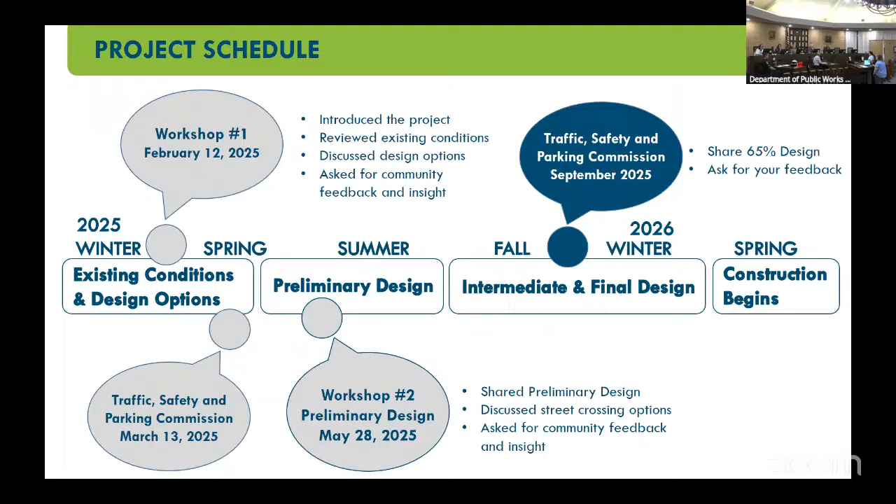Just a quick summary of outreach - some of this you've seen before, but I wanted to include our first meeting with the community back in February. We also did direct outreach to stakeholders along the corridor with private meetings, as many as would call us back or meet with us. We held 6 separate virtual stakeholder meetings, and a couple of follow-up meetings with others who had supplemental questions.

We had our original online survey with only 16 respondents. I then presented to you back in March and you gave great feedback. We had a second virtual community meeting in May, which was better attended than our first in-person meeting, with good feedback and communication. We had a second online survey where we only had 2 respondents, which is unfortunate.

Now, a summary of the feedback we've gotten. From the online survey, we heard: preserve existing parking along the corridor, vehemently requested by everyone; pedestrian crossings and sidewalk improvements along the corridor; concerns regarding large vehicle congestion and turning movements with any improvements; and concern about vehicle capacity if we reduce a lane through a road diet.

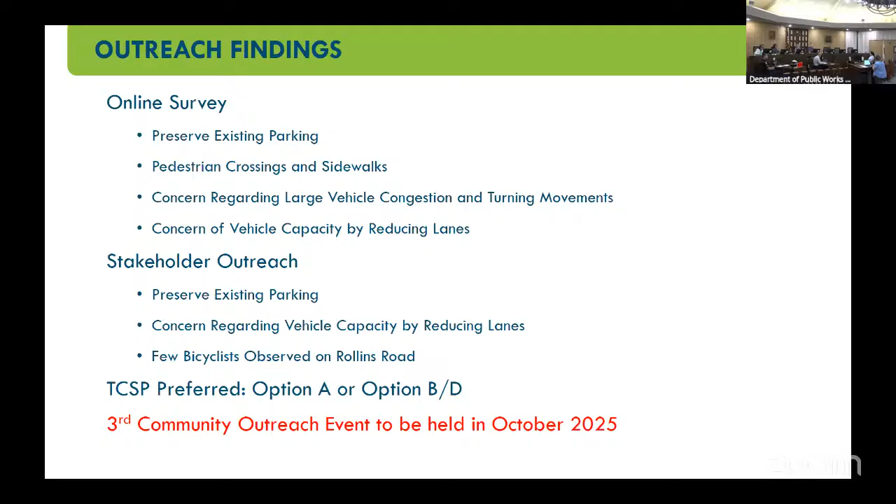So based on all the feedback that we got, both from community members, from the online survey, and from this commission, we selected the concept that you see on your screen there, which includes a road diet, preserves parking on both sides, has the center turn lane, and has the Class 4 buffered bike lanes on either side. And this is also consistent with the bicycle and pedestrian master plan preferred concept.

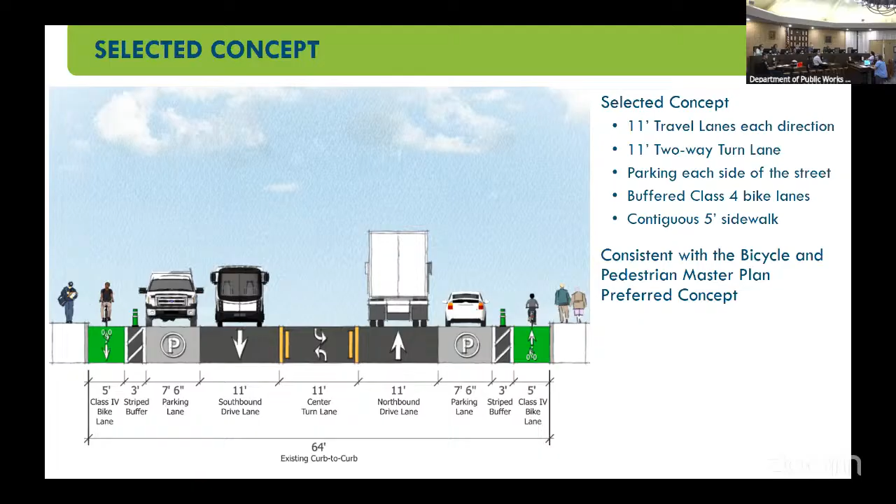So that's in line with the prior outreach efforts that were done then. Now, some of how we arrived at that particular conclusion—as I was going through what concerns were being raised by the stakeholders and the online survey and such—we used that as our guideline for selecting which cross-section to move forward.

So, for example, vehicle capacity was a major concern, and the existing roadway has the ability to convey 36,000 vehicles per day. The actual average daily demand today is less than 10,000. So with a road diet reduction, we're only reducing the capacity down to 25,000 vehicles per day. So in that regard, we felt that the road diet was appropriate in this scenario.

The concern regarding on-street parking: in the existing condition, if the corridor were parked efficiently—and as we know, it's not currently striped for parking, it just has the side bar—people are not actually taking up their 20 to 22 feet per vehicle. So they're not actually parking efficiently, but there would be 281 stalls.

With this proposed concept, we're reducing down to 264. However, we are striping each of the stalls so that there could be 100% efficiency in that parking. So this is less than, I believe, a 7 or 8% reduction in the overall parking.

And then, of course, the question about bicyclists. Well, to be honest, why would you ride in a Class 3 bike lane along Rollins Road with significant heavy traffic? You wouldn't. So what we're proposing is upgrading the Class 3 and Class 2 bike lanes that exist today to Class 4 buffered bike lanes.

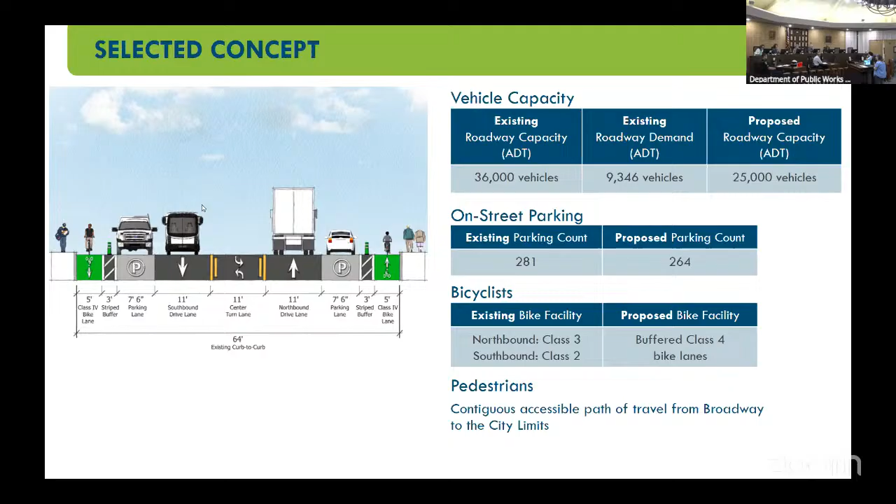Now, the next thing that I want to show you is actually a little bit of a change from what you saw before. Originally, when we presented this to the commission, we had not included improvements between Marsten and Broadway. And largely that was to try and limit some of the impacts to the businesses, as well as any queuing situations, and of course some projects that will be coming online later.

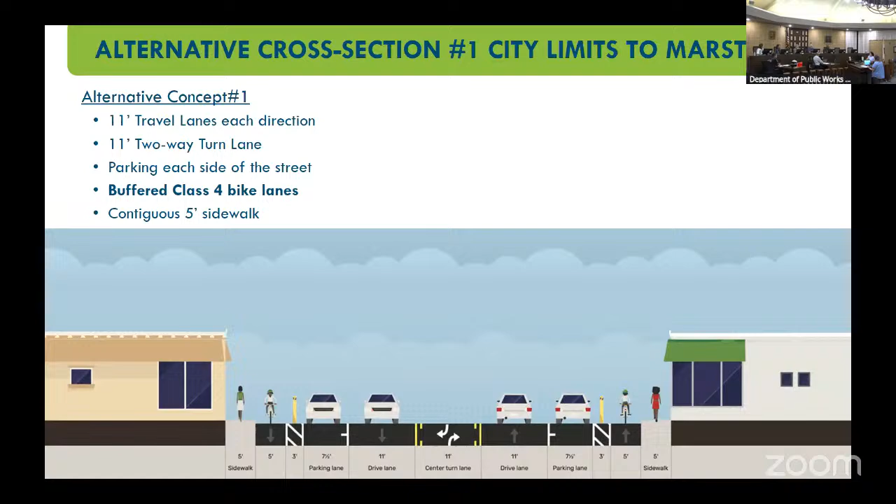When we have high density housing going in there, and we have it now, any accommodations made for increase in traffic entering and exiting those complexes? Was there any accommodation made in the plan for that? Right now, the street capacity is significantly more than it needs to be, and it can accommodate larger facilities when it comes to volume of traffic for vehicles. As for where the driveway comes in, it's been designed in such a way that should be a fairly easy modification. We may lose a few parking spaces if it's currently an empty lot.

Basically, the design is made so that as potential lots are redeveloped or new development comes in, it's a simple modification to what's there. We have the codes for turning movements and that sort of thing. Driveways are obviously bigger if it's a commercial business coming in versus a residential, because of the type of vehicles that will be coming in. Usually with a residential high density thing, you're looking at an Amazon truck turning in and out, or a UPS truck versus a double wide semi truck, which is the auto related sort of vehicles that we see quite a lot along this corridor.

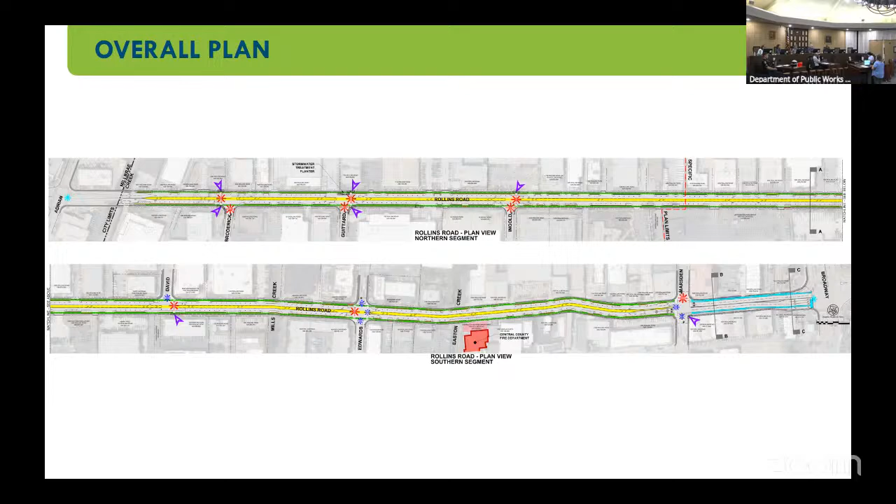Okay, and you led right into my next question about delivery trucks. Can you go back to the alternatives, the last slide you had? So what would that look like? The delivery trucks along this corridor, are they going to take up a lane? Or are they going to try and squeeze into a parking area? Or are they going to turn into a driveway of a business? How does that look?

So currently there are zones marked yellow for certain businesses, and we are maintaining all of the existing yellow zones, meaning the area where the cars are currently parked gets striped with yellow, and it's a loading zone for those businesses. So we're maintaining those. There isn't a whole lot we can do about it — usually I don't want to point fingers, but it's typically the vehicle delivery trucks, we've all seen them with all the trucks and everything. They will likely go to a less busy parked area, and then they'll pull into the parking space and take up multiple spots to wait for their ability to turn into the business.

Okay, they should not be camping out in the center turn lane or in the travel lane — they can't block the travel lanes. Some of them do even today. Because then you're going to have people racing in that left turn lane around them, right? And then we have a problem. So, okay, but they're not really allowed to park their delivery truck in that travel lane or the center turn lane.

All right, those were my questions. And then you asked for recommendations on a couple of things, so if you want to go to those two slides. So, intersections — this is brand new to the commission, you had not seen that before, so I was hoping to get your feedback on this particular layout. And then the second bit of feedback would be a preference of alternative 1 or 2, or an amalgamation of the two.

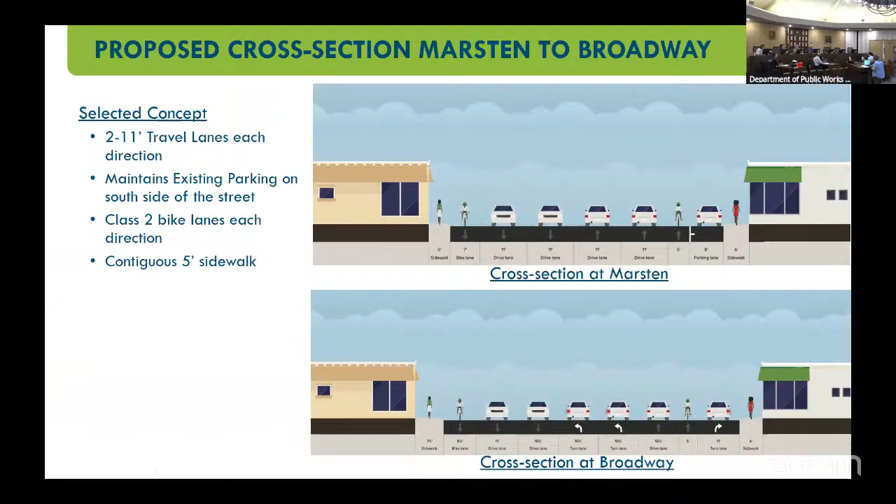Okay, so back to the intersection. That was at Broadway and Rollins, right? Was there a complementary Broadway intersection on the other side, or is this just the one intersection? Never mind, forget I said that.

So we're going to look at this. Any opinions or concerns about this routing of traffic and bicyclists? I think it looks like a good solution, I don't know that there's really any other choice. At least you preserve parking on one side to make some people happy, and you've fit everything else we need in.

Note there isn't parking on the other side currently, so we aren't eliminating parking. I'm just glad you decided to continue, and I think as much as we can, we should create continuity - this is clearly one destination, people aren't jumping off to go somewhere else, they need to traverse the entire stretch. You're committed, so I'm glad to see we have a plan that takes us all the way through.

I don't have any other comments. Commissioner Brown? No, I agree 100%. I think because this is probably where most of the traffic occurs on Rollins Road when they're making these turns onto the freeway or into Burlingame, being able to keep the flow, I think this probably makes the most sense as well.

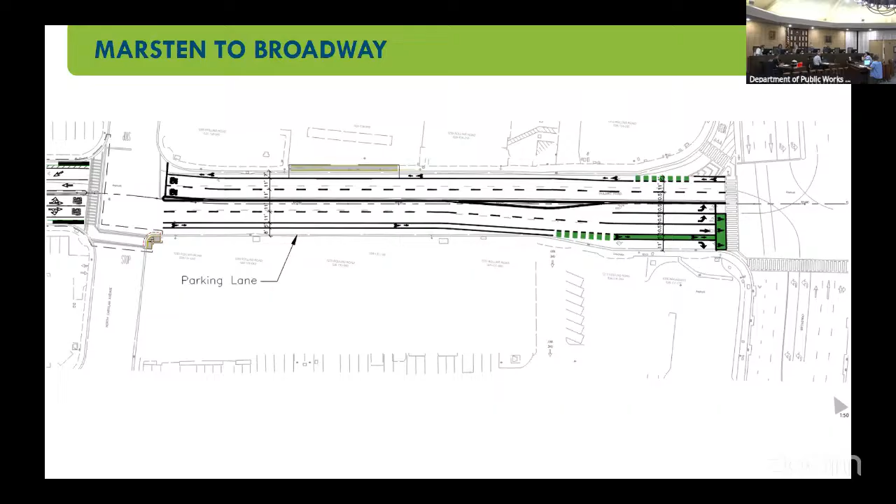The second question was bollards or concrete medians - who wants to give an opinion on that? I think the green bollards, having like a wall of bollards, is more noticeable to me as a driver, but you have the experience and know what actually ends up being safer. It sounds like the bollards are fairly, like 2/3 the price, but they also have higher maintenance costs. So I think either solution is fine. I wouldn't want to pick one myself without knowing if this project is funded, or whether we need to take cost into consideration.

And which alternative has been safer for cyclists? I would just go with the experts who know that. But they both seem to be acceptable and very good alternatives.

Commissioner Brown: I have a question because I think that's a good point. I wonder if there can be a combination of the two. I wonder if you can have the visual of bollards, but maybe not a whole line of them, but space them out so that there's a visual and you still have the safety that the concrete provides.

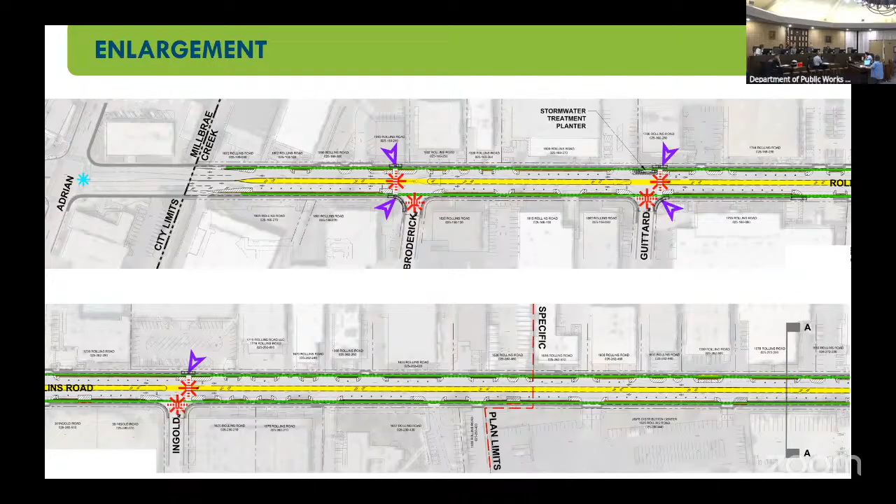Any other last thoughts? Do we provide you enough information? I think you gave me a lot of really great information. Okay, I appreciate everyone taking the time. It's a great project. Did a great job. All right, thank you, Ms. Herberston.

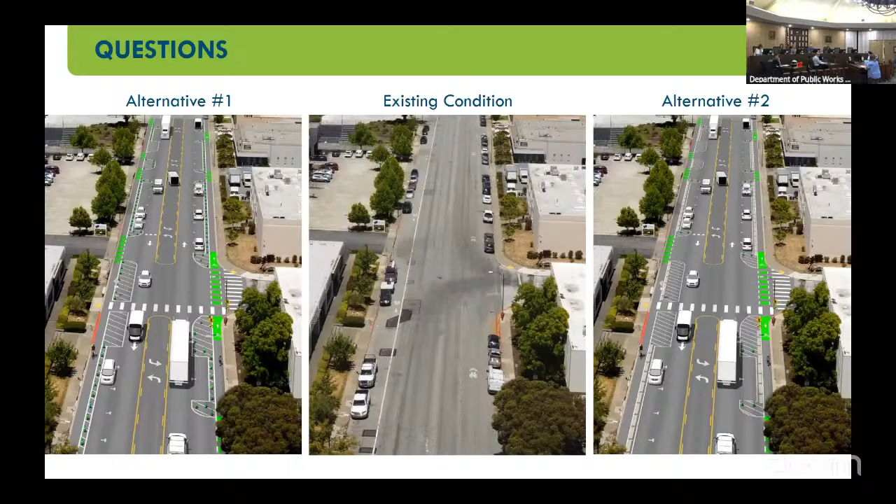We appreciate it. And the next phase will continue - when might we see final designs and implementation? So you will be seeing final designs by the end of the year. Okay, for our funding requirements, we need to be at that point.

So I appreciate you working me in this month and not pushing till next month. That was going to make things difficult. And Mr. Wong? Sure, no, that's correct, because we're going to have the October event. What I was just going to mention - public comment - just in case.

Is there any public comment? There's no emails. Okay, appreciate it. Well, we thank you very much for the presentation, and we look forward to the final design. Very good.

All right, we will move on to item 7A. Any public comments to any of the informational items? Mr. Ting, any public comment? There are no public comments. It's all procedural. I knew there wasn't, but I had to ask.

All right, so community group updates, anything, Mr. Ting? There are no updates. Okay, thank you.